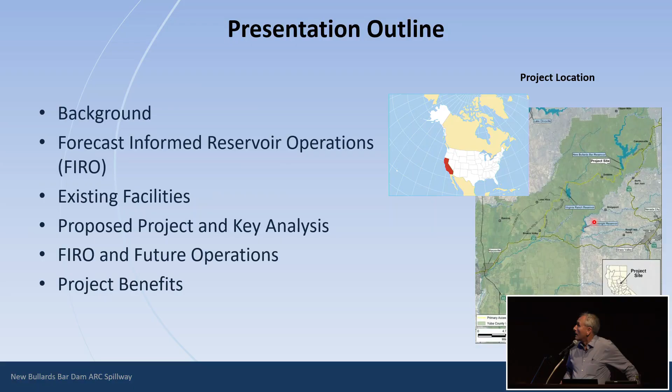First, how am I going to present this? I'm going to present two pieces of the puzzle. The first piece, I'll talk a bit about background, and then forecast informed reservoir operations. Then I'll talk about the project itself, which is really all about what you're going to hear me call FIRO, F-I-R-O, because the full name, Forecast Informed Reservoir Operations, is very long.

So where are we located? We're located here in the United States, on the western part, shown there in red, in California. More specifically, we're in Northern California.

I think it's important first to understand the complexity of how water management is done in the United States. My colleague touched on this a little, and I'll touch on it more. We have the federal government, the state government, and local agencies. When we talk about these large multi-purpose projects and dams, typically all three are participating.

In some cases the Corps of Engineers is the owner, operator, and actually constructed the dam. In the case of New Bullards Bar Dam, the Corps of Engineers participated, meaning the federal government sponsored a project that was going to be a multi-purpose project, and that's New Bullards Bar Dam.

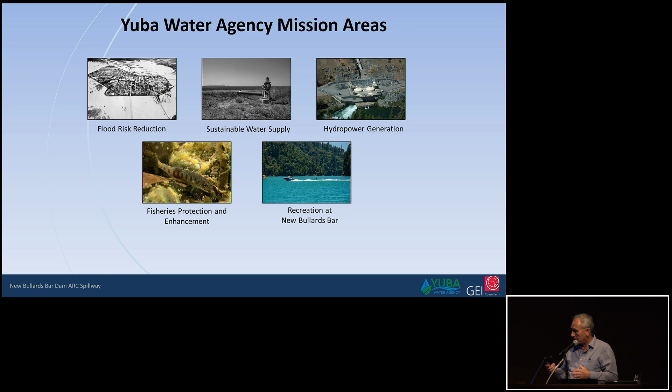The Sacramento River Flood Control System was actually created right after the gold rush, after 1850, when you had a lot of population coming in.

When you look at the geography of California, you have very high mountains to the east, up to 14,000 feet, then coastal mountains to the west, which are much lower. And then you have this Central Valley, which is basically a big plain established over millions of years, and is basically a floodplain.

So after 1850, as populations started coming in, they had to protect those populations. Cities started growing, so they protected the population and their farms through the construction of levees. Between 1850 and about 1870, these levees were being constructed haphazardly, with no coordination, and they were failing fairly regularly.

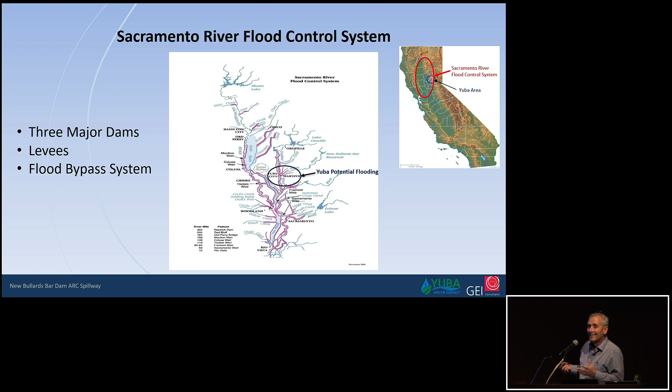Collectively this system works together - the dams, the flood control facilities, and the operational rule curves on each of these major dams - all trying to prevent overtopping or failure of the levees, which are very old. It's important to understand how this system was put together, because that's what we've been trying to fix over the last several decades.

So what's been happening? Right after 1850, you start having a lot of floods throughout the entire Central Valley, with levees failing normally. Then in 1955, after populations were well established, there was significant flooding in Yuba County, the area we're trying to protect with New Bullards Bar Dam. That major flood caused the creation of the Yuba County Water Agency.

This new local agency's purpose was not only water supply but really instituted for flood control - that was the real reason. New Bullards Bar was then constructed in the late 1960s and 1970s, which protected the city more. However, there's still flooding.

There are still these levees that are old, 150 years old, and they're still failing. Any time you have large storms come in, you get levee failures, resulting in significant damage not only in Yuba County but throughout Northern California, causing millions and billions of dollars of damage as well as loss of life.

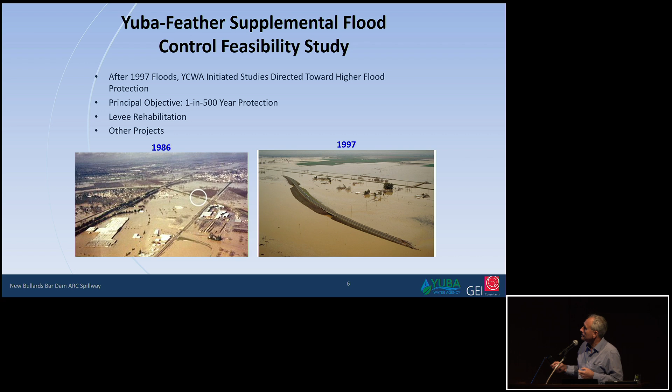The first thing that happened was in about 2001, when the state of California provided about $100 million to begin development of levee repairs in and around Yuba County. That was a good boost to get things started.

Remember, most levees in California, when they fail, actually fail as a result of underseepage, not so much overtopping. These levees are old, built on natural sand deposits, and that's typically how they fail.

Now around 2005, if I remember correctly, there was a major hurricane in New Orleans, which actually failed many of the levees there. That's what kick-started a program called FloodSAFE California.

It was actually a program that I ran for a couple years. The idea was we got a bond measure for about $5 billion, to be used statewide to improve flood management. But the bulk of the money was going to be put into Northern California, because the state of California just lost a $1 billion suit because of failed levees.

So there's a combination of issues that had to be taken care of. First, it was the local agencies that were allowing the risk to go higher by allowing folks to construct housing behind these poor levees. But it was the state of California that was taking on that risk.

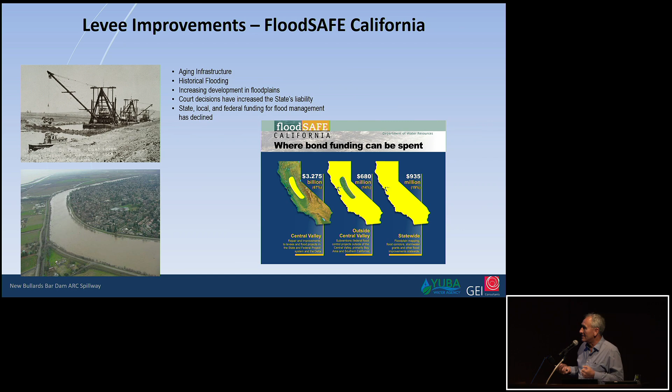So this was a huge influx of money, and it provided a significant amount of flood protection by improving those levees. You could see on the picture over on the left, there's huge populations behind some of these levees, so it's quite significant.

Now, I think it's important to understand, because we're going to start shifting into FIRO, or forecast-informed reservoir operations. The only way it's going to work is if you could actually forecast weather, and there is certainly a significant amount of uncertainty in forecasting weather.

However, we're a bit fortunate on the western part of the United States, unlike some of the Midwest states, in that we can actually see the storms developing, and we could tell where the storms are developing from, which is an absolute critical point.

If a storm's developing up in the Alaskan area, then that storm's going to be very cold. It's going to come in and hit California, and it could have significant precipitation, but that precipitation is going to fall as snow. Typically on a very cold storm, that could be a snow level of 2,000 or 3,000 feet, all the way up to 12,000, 14,000 feet, it's all coming down as snow.

And so that provides local flooding, but it doesn't generally provide the regional flooding that you see. Now, the difference between that and another type of storm is what the media has called the Pineapple Express storm. We call it atmospheric rivers. These storms are created in the warmer waters near the Hawaiian Islands, and they come straight through and funnel right into California.

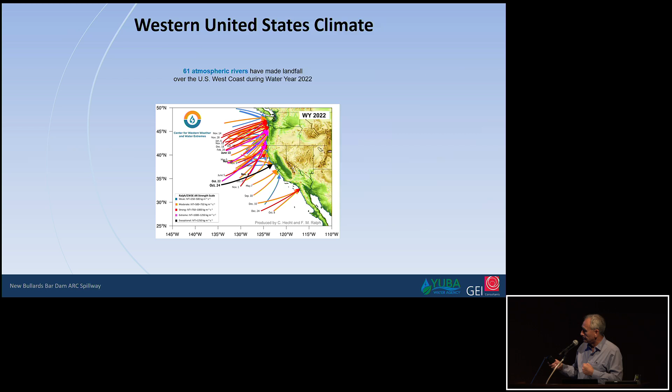Another issue, of course, is climate change. Climate change in California is very uncertain. I was running the groundwater program at one time, and we had to consider climate change. So we studied that, and we looked at the various studies, and they're all over the place in terms of precipitation. Some studies are predicting less precipitation, some are predicting more. We're all over the place in that prediction.

But there is consistency among the studies that no matter the precipitation, whether it's minus or plus, it's going to be warmer. I think that's what we've been experiencing over the last 50 years: the storms are going to come in warmer, causing more rain and less snow, which creates all kinds of problems. It creates a water supply problem because historically the snowpack was a major reservoir for the state of California. Now that's going to get lower snowpack, which creates significant problems.

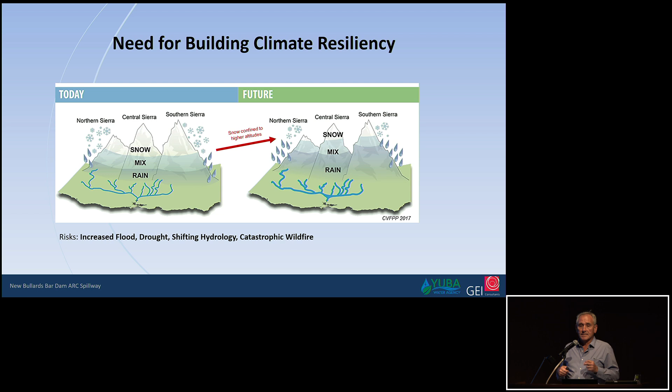In addition, that precipitation is going to cause more flooding. The problem with climate change is it's very uncertain right now. We don't really have a good grasp on how climate change is going to affect us, but we think it's going to affect us negatively, so we need to start preparing for it. And that brings us to forecast-informed reservoir operations, which we just call FIRO.

There was a great question earlier: why don't you just build more dams? Well, in California, that doesn't seem to ever happen. We just can't seem to get the population to agree to construct any new dams.

The only dams being constructed, and there are some major dams, $5 billion projects currently on the books that may get built in the next 10 years, are all off-stream reservoirs only for water supply. As water comes down the river during a flood, they'll pump water into these reservoirs solely for water supply, but it won't really help us from a flood control standpoint.

The last major flood control dam, called Auburn Dam above Sacramento, was proposed at a time when Sacramento had less than a 1 in 100 year level of protection. Even that got shot down, generally for environmental reasons. I just don't see us building any more dams on rivers in California.

This really prompts us to do things like forecast-informed reservoir operations. We need a smarter way to work with the existing infrastructure. We've fixed the levees to a point, but they're still 150-year-old levees. We need a better way to actually operate the reservoirs, and that's where FIRO comes in. That's what we're going to be talking about over the next several slides.

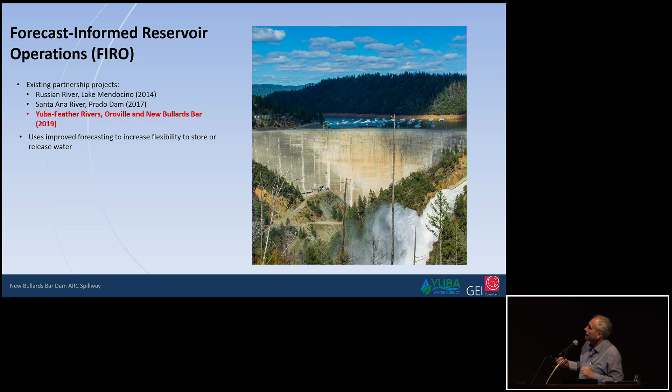Forecast-informed reservoir operations are essential. I explained the complexity of water management in California—you have federal, state, and local agencies, and they have to work together to move this forward. Over the last decade, they've been working together in a variety of ways, improving and participating collectively to install better instruments, both on the ground, like rain gauges, river gauges, and atmospheric gauges.

They've even started looking at airborne instrumentation to understand storms better. They've also been developing and checking their models against various storms, continually improving the forecasting system. As this gets better and better, we think we'll be able to forecast longer and longer, and I think that's really the goal we're trying to achieve.

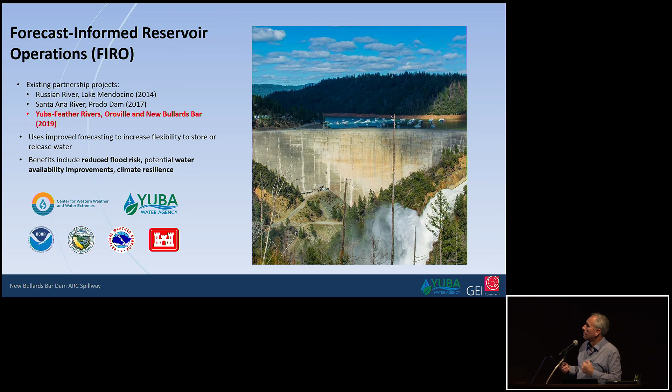Now let's get into the project I'm actually the project manager for, one we're pretty much finished designing: New Bullards Bar Dam. It's one of the largest concrete dams in North America, a little over 600 feet tall, a variable radius arch dam—an amazing structure, curved both ways, fairly thin for a concrete dam, with about 1 million acre-feet of reservoir behind it, just a little under that.

Some of the major features: it's a multi-purpose dam, so it's also generating hydropower. You have a penstock that feeds a powerhouse thousands of feet downstream. The other major feature is a radial gate.

Right now the radial gate is on the left abutment of the dam, and that's what's controlling floods today. When you start encroaching within that flood space, they have to open those radial gates in order to get back down into the flood space. They've also got requirements to keep the flow below a particular amount right now, generally below 50,000 CFS.

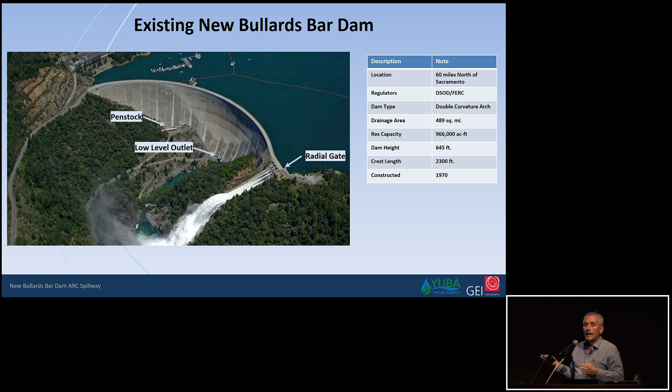This reservoir actually operates in conjunction with Oroville. This has an arm of the river, Oroville has an arm in the river, and in Yuba County they come together. So this rule curve has to complement Oroville's rule curve, and it does. Any modifications we do with this project, because of FIRO, we're going to have to do that with Oroville, because they're going to work together to protect the community downstream.

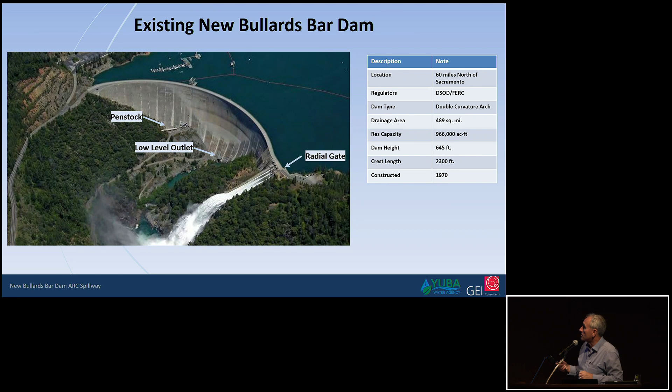This project is basically giving us more flexibility. In the existing system, the spillway is at the top of the dam, where you don't have much head, so you can't get water out quickly enough, and you don't have a whole lot of volume. This design puts in a new spillway, lowered by about 30 feet, giving us both the power to drive water out quicker and additional flood space of about 120,000 acre-feet of available storage. Now we're able to get about 35,000 CFS out at the bottom of the flood pool.

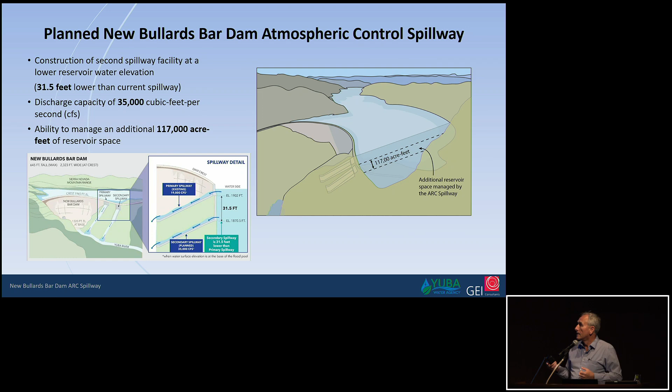So we're already at the bottom of the flood pool. If they see an oncoming storm, they're going to reduce the reservoir even more, which provides more flood management for downstream. That's really the idea of this particular project.

The project requirements came to the design after going back and forth checking the flows between the reservoir, the inflows and outflows, and how that would affect the levee system downstream. It was an iterative process, and we came up with the most optimal point being about 35,000 CFS capacity at the bottom of that flood pool.

This also is going to provide us a redundant spillway. Hopefully this particular dam never has a case like what we've seen at Oroville, but if it does have a problem in the future, this redundant spillway is going to help.

The other critical project requirement is that we had to design the project so it would not affect the operations of the current reservoir. We had to make sure we're not emptying or lowering the reservoir in any sense during the construction of the project.

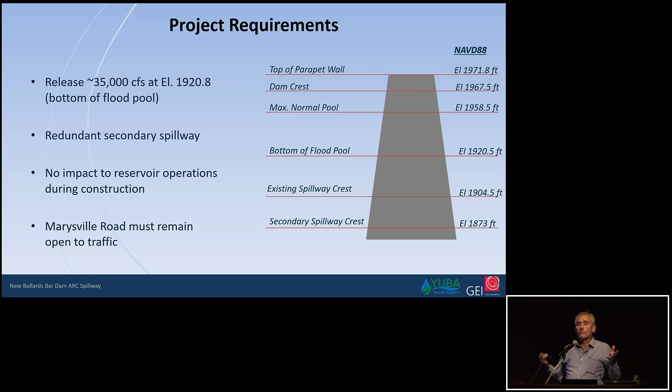There's a major arterial road that goes over the top of the dam, serving the community upstream and downstream. It's really the only road through the area, and without it folks would be trapped or have to drive hundreds of miles around to get where they wanted downstream of the dam. So another requirement is to make sure that road stays open during the entire construction of the project.

Those are the project requirements. When we started the design, we looked at the left abutment. We wanted this spillway to be completely separate and apart from the existing spillway. There's a rock knoll there, and we looked at designing a tunnel through that rock knoll.

That created a couple of problems. The biggest problem was a cofferdam. If we put this tunnel through the rock knoll, we'd have to move the structure somewhat upstream, which would require us to build a cofferdam in the reservoir. That cofferdam alone was going to be $50 to $100 million just to build, with significant risk associated with its development. Additionally, there were some hydraulic problems associated with going through that tunnel.

After a value engineering study completed at about the 30% level, we decided to abandon the tunnel. Instead we're going to cut a notch through the left abutment and build a new structure, similar but more up-to-date than the existing spillway structure.

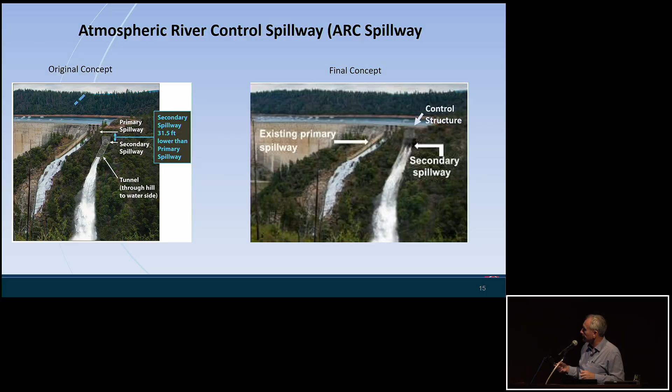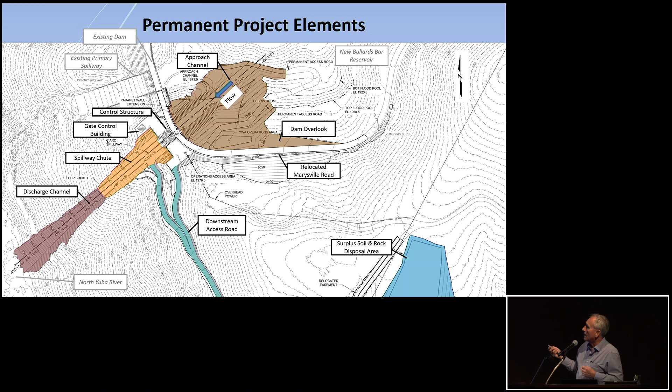I'm going to go through the various features of the project one by one. We'll talk about the upstream area and how we're going to deal with it, the control structure, the spillway chute, and then the discharge channel. I'll go through these quickly.

Obviously there's a significant amount of analysis supporting this design. We started this design in about 2020, completed it probably about a year ago, and we're just waiting for some final approvals.

You have to understand the geology really well. The rock is actually very good, very strong, competent andesitic rock. It's a bit porous on the downstream end, but very tight where the control structure is going, so we don't anticipate too much grouting necessary there.

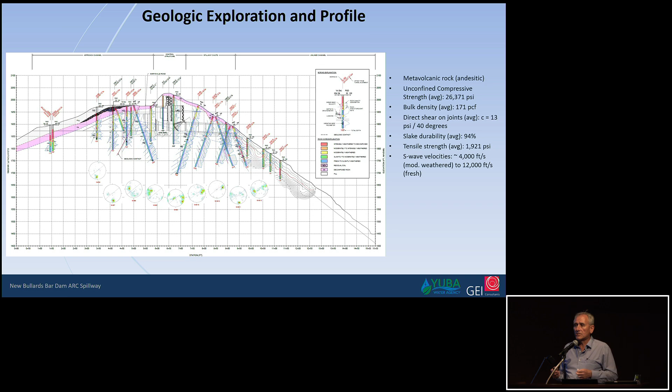The actual structure itself is complex, and we did a three-dimensional finite element analysis. Typically in California, structures and dams are driven by the seismic load.

It's important to understand that in this particular part of California, seismic load is relatively low. I say relatively because, like Japan, California has a lot of earthquakes. But the major, big earthquakes are in the Bay Area and Southern California near Los Angeles, producing magnitude 8s and well over 1G peak ground acceleration, and they're very frequent, happening every 50 to 100 years. When you get to the eastern part of California, it's significantly different.

The load itself is about 25% of what we see on the western part of California, and the frequency is much, much less. The return periods of these major earthquakes are significantly longer than the 100-year frequencies we see on the West Coast, which made this structure a much simpler one to design.

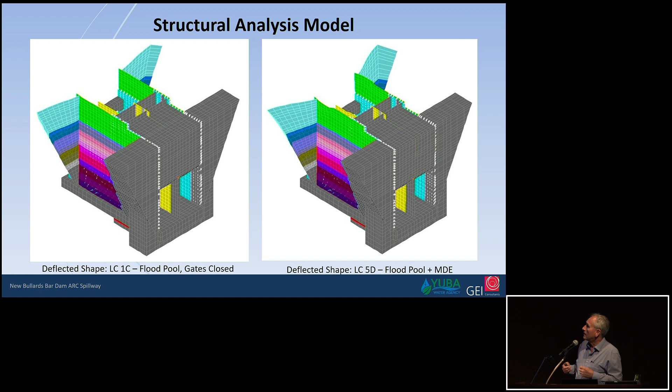It's a very complex but very robust structure that's going to be constructed there.

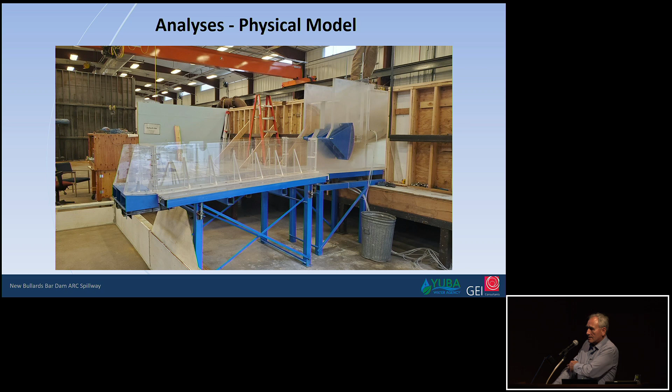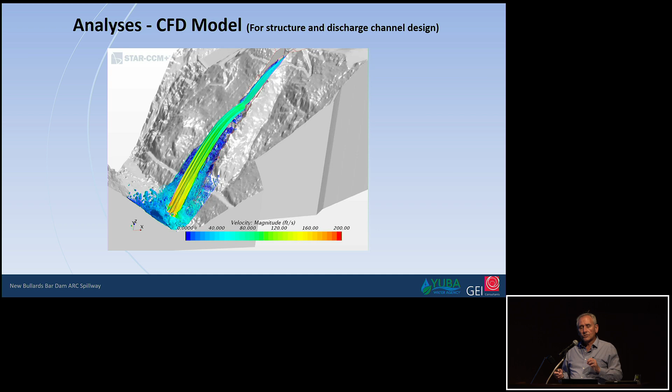We checked the hydraulics with a physical model, the same laboratory Dean talked about at Utah State. We also complemented that with a computational fluid dynamics model, and the CFD model and physical model matched almost perfectly. This allowed us to fine-tune the design of the entrance and exit points at the control structure, and we were quite happy with that.

Now let's get back into the features, the approach channel. The approach channel is actually going to serve as the cofferdam. By moving the structure downstream in the second phase scenario from the value engineering, we're able to use the natural topography as the cofferdam.

The approach channel will be excavated, but it's the last piece that's done. We'll construct all the downstream pieces first, and when the reservoir is low, that's when we'll excavate the approach channel. This protects all downstream construction and is the most cost-efficient way to deal with the cofferdam.

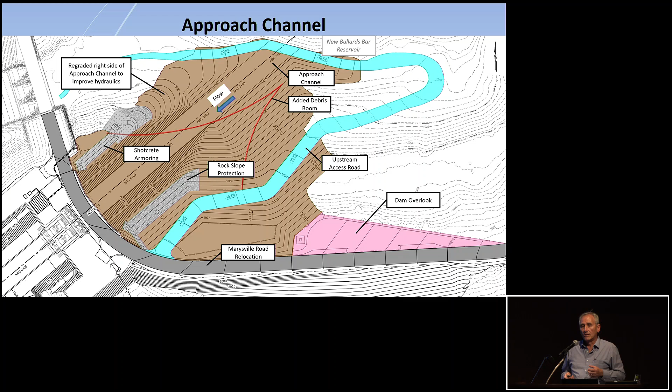The control structure itself will have two sets of gates. In the old structure, we only had one set, the three radial gates. In this case, we'll have two sets: the guard gates, which are like roller gates, and then downstream the radial gates, which are actually the ones controlling the flow. The guard gates are just for guarding the radial gates.

There are going to be submerged gates because now we're 30 feet lower, so you've got bottom and top sills on both the radial and guard gates.

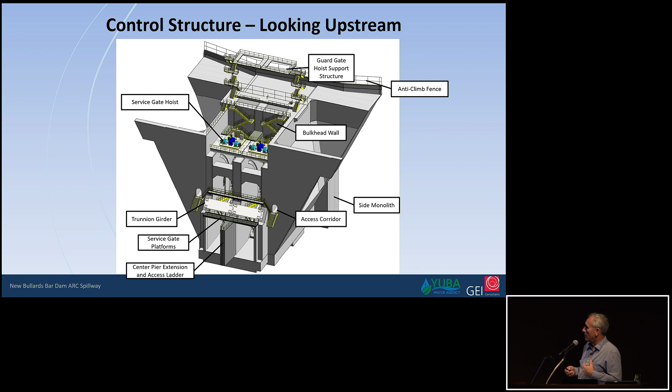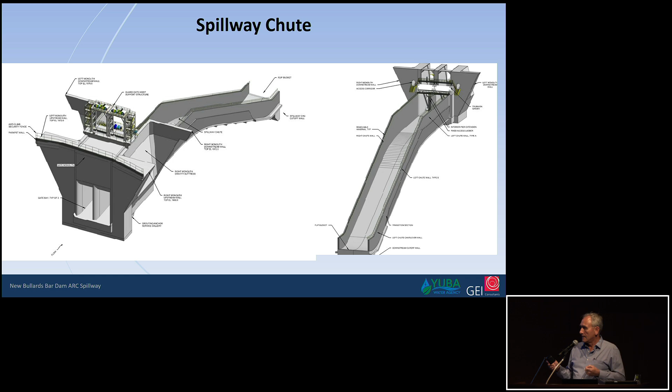Then you have the spillway chute. It's very traditional, meeting current standards of today. The one unique thing here is, unlike Oroville Dam, we're actually developing a flip bucket at the end, which leads to the discharge channel.

So half the spillway is a concrete structure, and the downstream half is a discharge channel that's just going to be excavated. When we design the spillway, we're shooting the water over the top of this entire discharge channel, so the water disperses and hits the downstream toe of the channel in a natural pool.

So the discharge channel itself really won't see too much flow, but it is an extremely steep canyon here, so the discharge channel is extremely steep. Finally, the Marysville Road will stay in operation during the entire construction.

We're going to move that road in order to accommodate the new structure, but that move is going to happen over hours so that there's never a break in traffic in this particular project.

So where does that leave us with the project? Where are we on the project? We have pretty much all of the approvals. What often takes time is the environmental documentation in a project this large. We've been working on that for years, and it's now complete. We have our two regulators wrapping up their final review. They've been reviewing the 30, 60, 90% design, and we think we've resolved all their comments, so we're expecting approval from those two regulating agencies in the next couple of months. So there's really just one hang-up right now, and that's a FERC license.

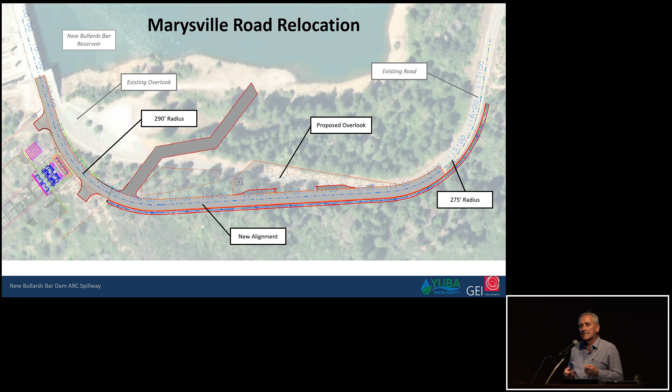When you construct a major dam like this with hydropower, FERC is not only overseeing the safety of the dam, they're also licensing the hydropower of that particular project. So when you have a major modification such as this, you have to get a license amendment, and that generally takes a couple of years. We're about a year into it, and that's really what's holding up the final construction start date. But we expect construction to start in about 2027, and this is going to be about a 4-year construction window to do all this work.

So the benefits are obvious. The benefits are really to reduce that flood risk downstream. And what is it going to reduce it by? Remember, you have all these levees downstream. They've been rehabilitated, with billions of dollars invested in the levees in the Central Valley. However, they're still 150 years old.

So what we're trying to do is reduce the level in that levee. That would, of course, not only increase the return period of any overtopping that occurred on those levees, it's actually going to lower the level, which has a significant and exponential relief of pressure at the toe of these levees, which is really what's been causing the failures of levees in Northern California over the last several decades.

This also gives us that operational flexibility. We're going to be able to release flows much sooner than what we have in the past, and release more flows at higher release capacities. This is going to provide that redundant spillway. Right now, this is a concrete arch dam with rock abutments, but it currently overtops in the design flood, the PMF. It's only overtopping by a few inches, actually, and so with this new spillway, that's going to eliminate even that issue.

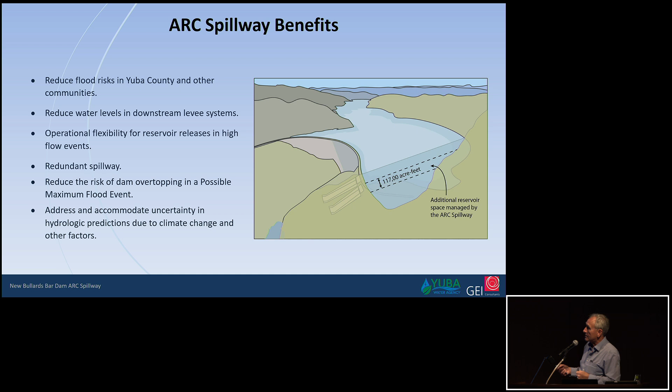So the future operations, as I previously mentioned, it's really a combination of organizations that's been working on this particular project, and that's going to continue. They're already doing forecast-informed reservoir operations on many projects in California, and there are 2 that are very close to actually changing their rule curve. These are actually owned by the Corps of Engineers, but the local agencies have been working closely with them because they're in need of additional water supply. New Bullards Bar, remember, is a little bit different. They're not trying to increase water supply; what they're trying to increase is more flood protection for this particular reservoir.

There's really the other issue: there's always a natural conflict between water supply and flood management, right? You want more water to store because you need it in the summer, but you want more space because you need that space for flood control. So that's a natural conflict. But in this particular case, and in all the cases we're talking about, the same agency is making that decision. So the agency dealing with flood management is also dealing with water supply, and it's going to be their decision to balance those two as they go through it, not only on this project, but on all the other projects.

More importantly, the community that's benefiting from a water supply standpoint is also benefiting from a flood management standpoint. So you don't necessarily have group X fighting with group Y, one wanting more water supply and one wanting more flood management. So far that hasn't been a particular issue where you see that particular conflict.